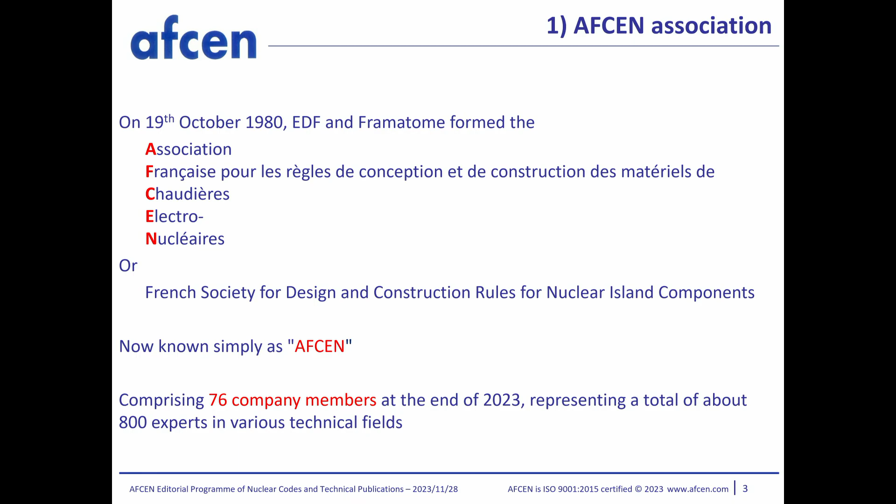It's an association, a society, an institute if you will, whose purpose is to set out rules for design and construction of nuclear island structures, systems, and components, as we will see later. This association brings together about 76 company members, with experts delegated by these 76 company members as we speak today. Globally, we are talking several hundreds of experts working part-time, most of the time, for AFCEN, in the various committees that we'll shortly describe.

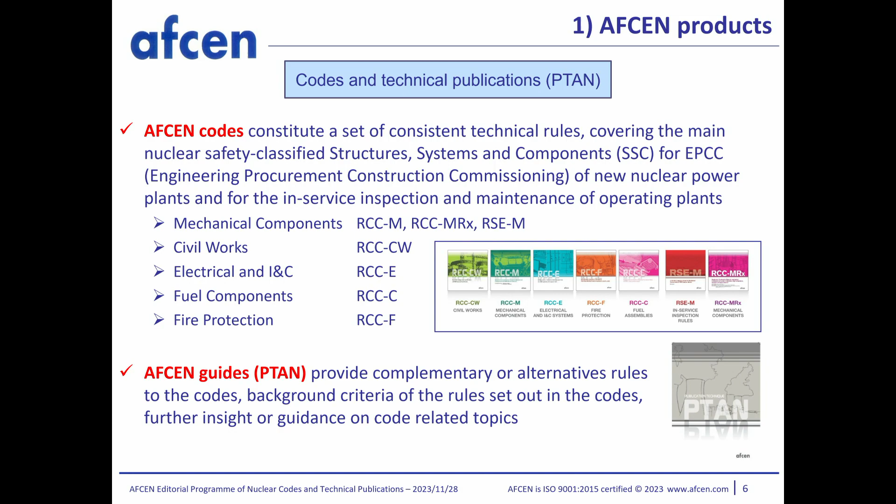So a few figures, and then we come to our products. Very basically, our products, first is the AFCEN codes, and we will detail the scope of AFCEN codes and their program of work a little bit later. This comprises 7 codes covering the main structures, systems, and components of nuclear power plants, but having a nuclear safety function - that's important. So mechanical components, civil structures, electrical and I&C components, fuel components as well, and fire protection. Most of them for pressurized water reactors, but one of them, the RCC-MRx, is for mechanical components for advanced reactors, high temperatures, fast breeders, experimental or even fusion reactors.

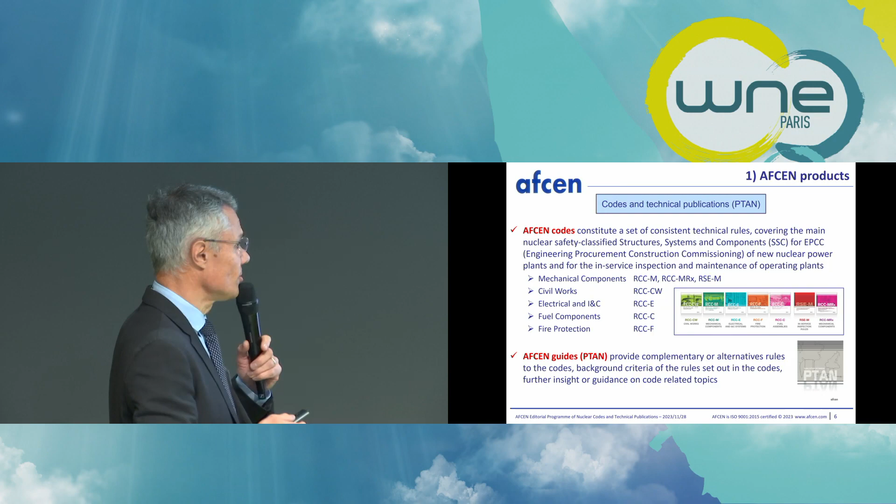And these codes are complemented by a set of guides, which we call PTAN. You have to get used and familiar with this name, PTAN. These guides provide complementary or alternative rules to the codes, and we'll see later a couple of examples.

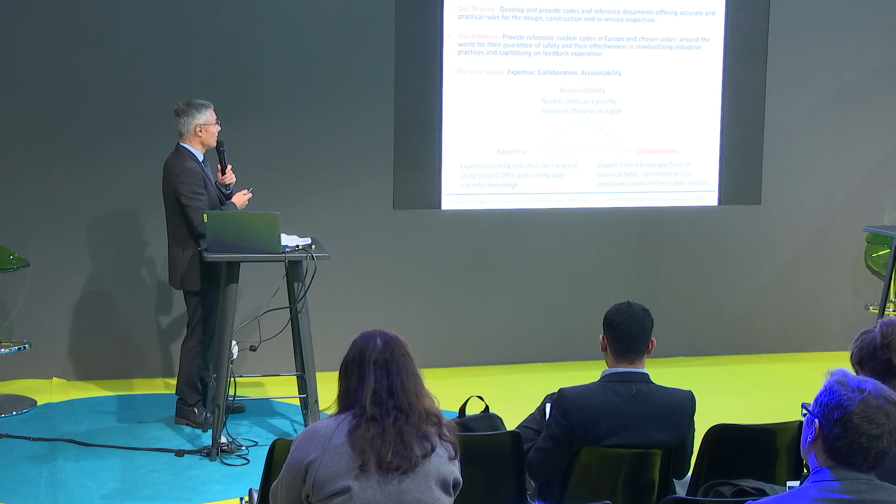Our field is really very centered on Europe, because we reference European standards a lot, and we have several examples of project development, first and foremost in France, but also in Europe. So really our ambition is focused towards Europe.

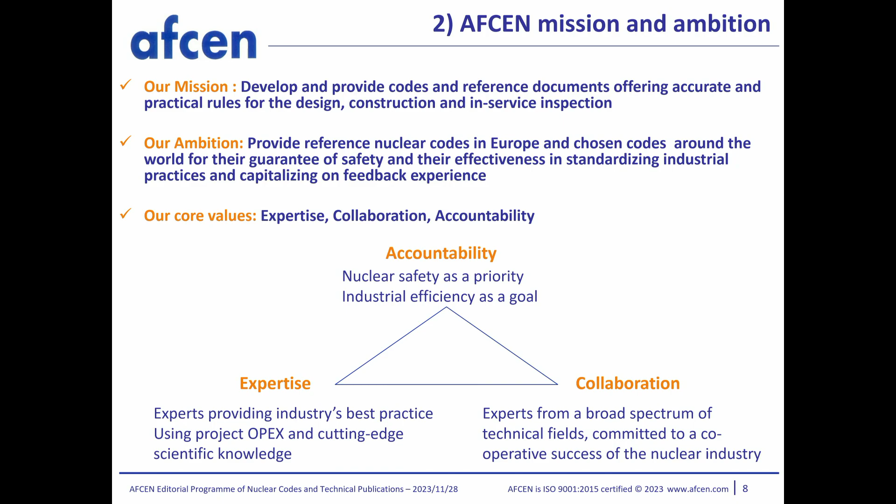Our values: expertise comes first, because we are an institute with experts sharing their knowledge and understanding, discussing and coming to a consensus about the rules to be used in the industry. Nuclear safety is the main driver and a priority, but we also need to consider efficiency of the industry. This is a balance to be discussed and agreed to come up with requirements and rules, and all these experts come to AFCEN to collaborate together.

There are three main challenges in our strategic plan. The first is about the editorial policy for codes, which I'll develop further. The second challenge is about interacting with our stakeholders; we need to be even more recognized and known by prospects, regulators or suppliers, and again our main target is the European landscape.

The third challenge is about knowledge in our codes and the ability to use them properly. That's very much in relation with the training that we, or partners of AFCEN, are providing.

But all these challenges cannot be overcome without as many resources as possible, expertise from all the industry. So this is a call to all of you at the WNE exhibition to join AFCEN. The more, the better for our rules, to have efficient, practicable, and safe rules for our power plants.

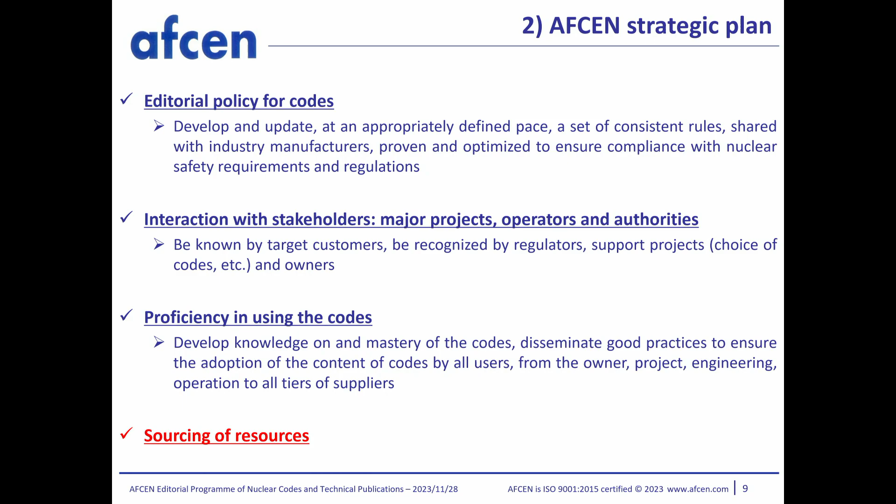Regarding the editorial policy, the challenge is really about clarifying the content, the intent, and the deadlines to further develop our codes and technical publications. To do so we need to consider a number of things, but most important is the experience feedback loop, and again this cannot be done without the support from everyone in the industry.

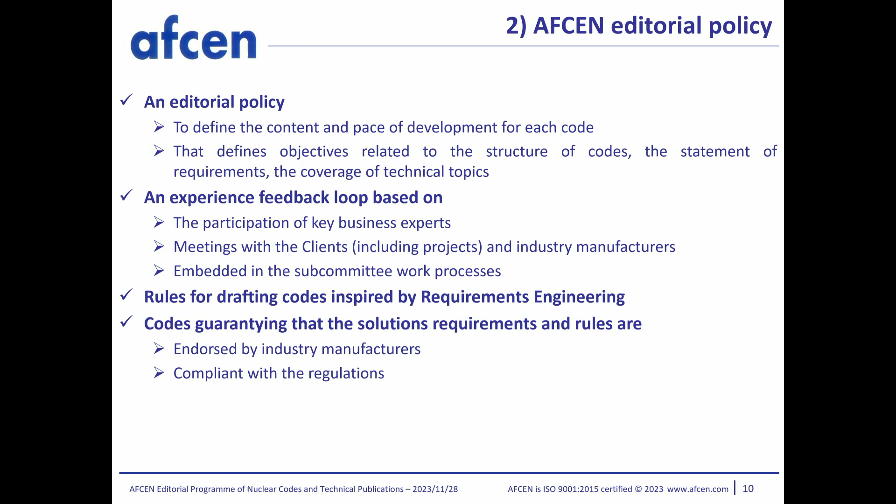We need the participation of key business experts, and we need to be proactive and go to our main clients, the projects or the main users, the suppliers and the manufacturers, to ask about their need and their experience. That's the whole idea, and all our committees work with that objective in mind.

So let's go now a little bit more in detail into the codes. We'll detail the scope of each code, what kind of structures or components they cover, what kind of activities they cover. But you'll find out they constitute a consistent set of technical rules from design to construction and in-service for these SSCs.

Let's start with the RCC-CW code, whose scope of application is really for civil structures that have a nuclear safety function.

The code covers all parts of the civil structures, from the geotechnical works to the buildings, concrete, reinforced concrete, or pre-stressed concrete for the containment building, the metallic liner for tightness of the containment building or fuel pools, all types of structural steel work, nuclear safety classified steel work, and the components in the civil works, such as anchors, joints, coatings, and paints.

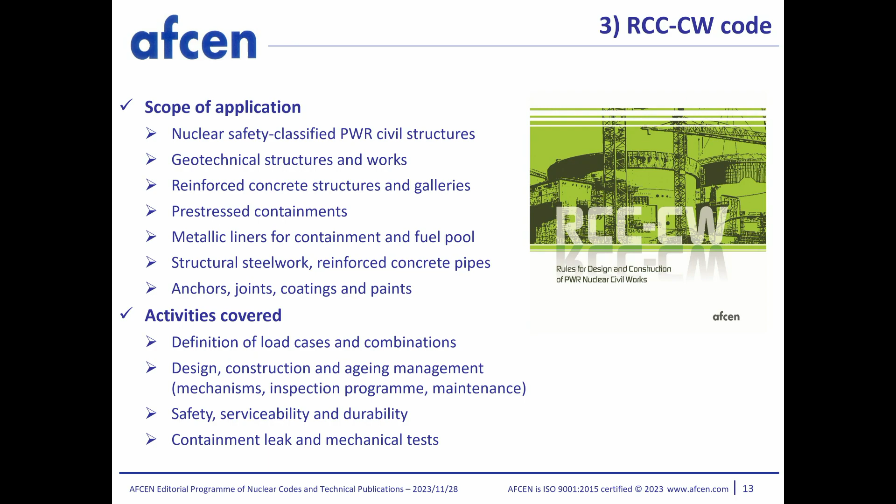Activities covered go from design up to construction, and now our codes also include chapters dedicated to aging management of the civil structures, all to serve safety, serviceability, and durability of these components.

Okay, the RCC-M code, maybe one of the most famous codes in our suite.

RCC-M code covers mechanical components of pressurized water reactors' nuclear island. Mechanical components mainly means pressure equipment or parts attached or included in this pressure equipment, with 3 levels of quality as usual. Parts attached or inside this equipment include vessel internals, supports, also other equipment like storage tanks, piping, vessels, heat exchangers, pumps, and containment penetrations.

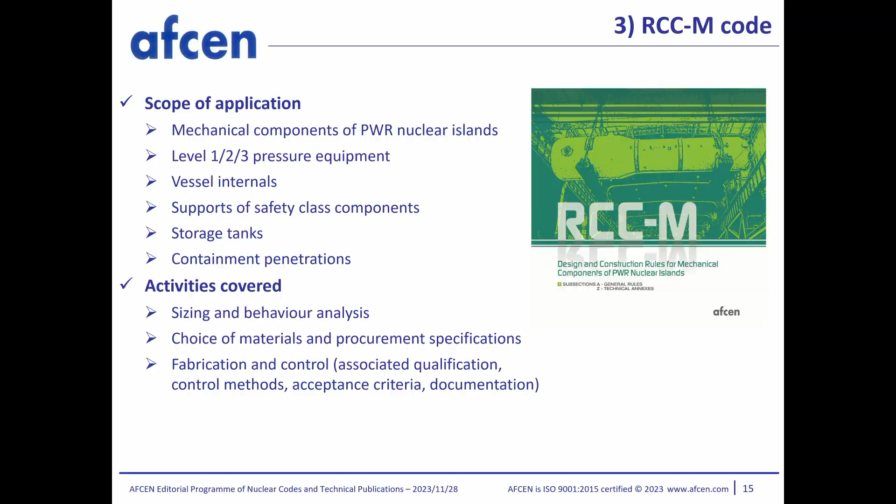Activities covered go from the design, its sizing and stress reports, the materials, how you choose the materials, the specifications to procure parts and products, fabrication and control processes and methods, all the rules to qualify these processes and methods, and all the documentation parts. So it's really a comprehensive guide to construct, that is design and build, such pressure equipment.

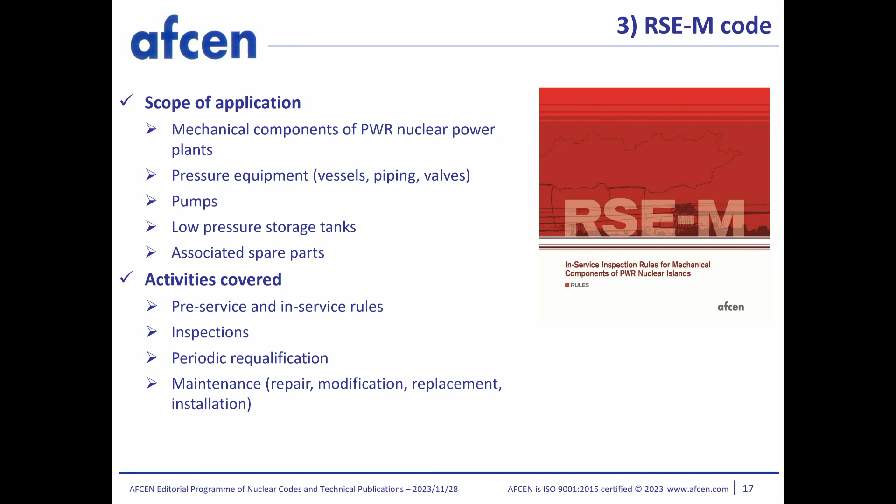RSE-M code is the companion code, if you will, to the RCCM, because it deals with in-service inspection of roughly the same scope of mechanical equipment as the RCCM. So again, vessels, piping, valves, pumps, storage tanks, and all associated spare parts. During in-service, it starts with the pre-service inspections and covers up to maintenance, that is repair, modifications, replacement, and how to install them on an existing plant.

So the last one is another mechanical code, if you will, but it deals very specifically with the nuclear fuel components. So the fuel assemblies with its fuel rods and fuel pellets inside, but also the control cluster assemblies, rod cluster control assemblies.

And similarly as for the other mechanical equipment, it covers design up to manufacturing and inspection of these components. But also interesting to mention, it also deals with the requirements for handling the fuel and transporting and storing them.

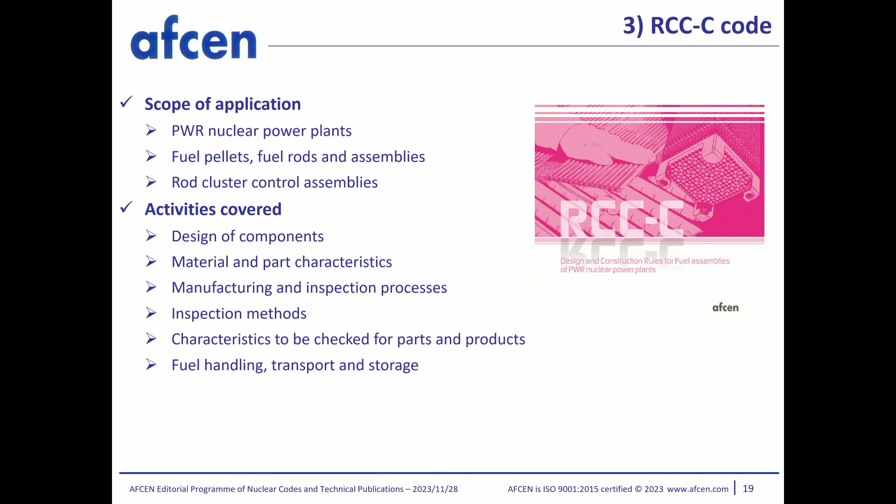Okay, let's change now a little bit of discipline. This is electrical and automation, instrumentation and control, again for safety classified systems or systems that could have an impact on safety classified systems. So you have parts in the code dealing with how to design the architecture of electrical systems, or the architecture of I&C systems, and other parts dedicated to how to procure, build, and qualify electrical or I&C equipment.

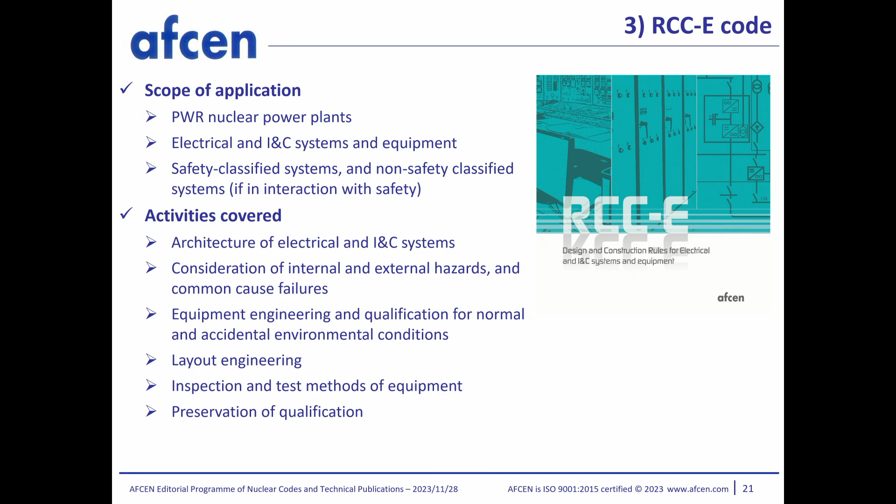Qualification means rules to demonstrate that your equipment will fulfill its functions even during accidental conditions. There's a dedicated volume on how to lay out these systems and equipment, considering all kinds of hazards, internal, external hazards, or common cause failures, and also a part dedicated to inspection and test methods for this equipment. Also important to mention, the RCC-E manages the preservation of qualification for this equipment during the lifetime of the plant.

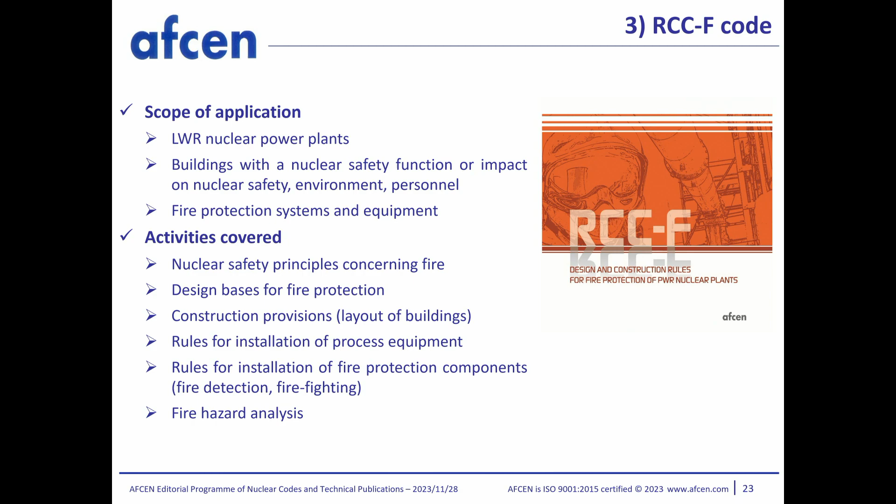The next one is the code on fire protection, applying to buildings with a nuclear safety function or hosting nuclear safety classified equipment. So the code will give you principles for nuclear safety regarding the fire hazard, a basis to design the fire protection systems in your building, and also provisions to lay out the buildings. Most important, it's really a guide to take you through the assessment of the fire hazard.

RCC-MRx is a very special code for mechanical components of advanced reactors, so far used for fast breeders, sodium-cooled fast reactors, research reactors like Jules Horowitz reactor, and fusion reactors. Parts of ITER are using the RCC-MRx. Again, in the same way as the RCCM, it covers from design to fabrication, including welding, of course.

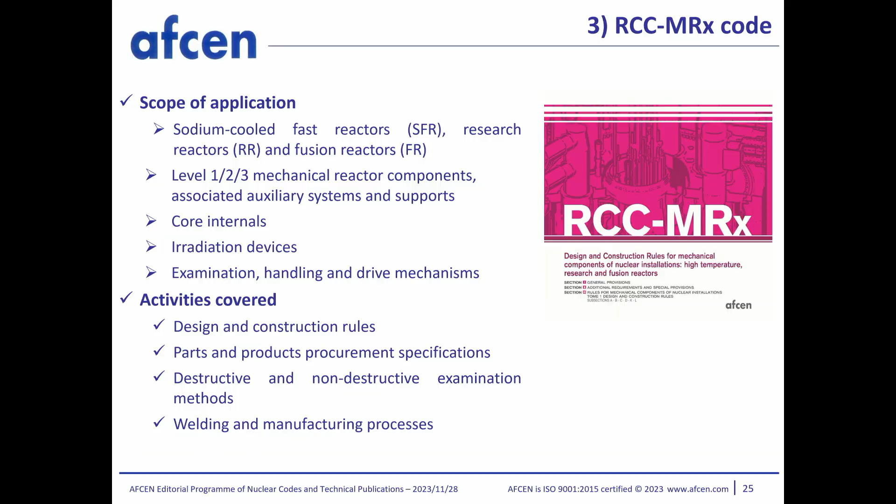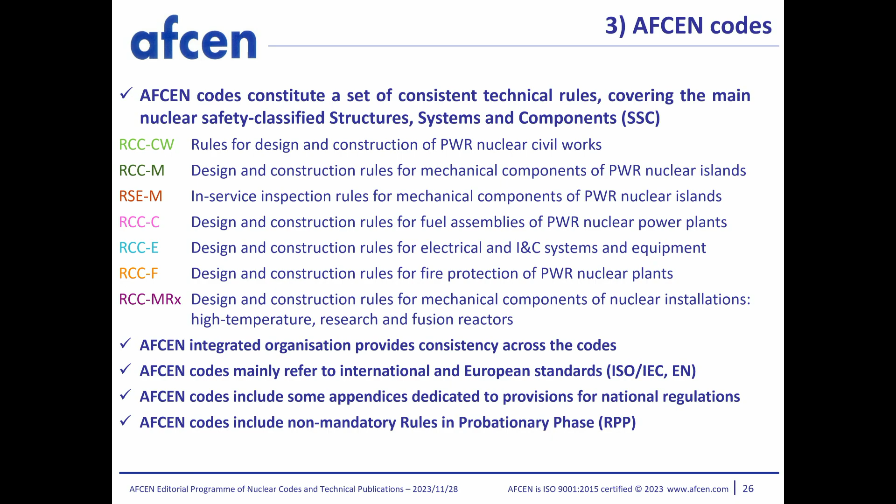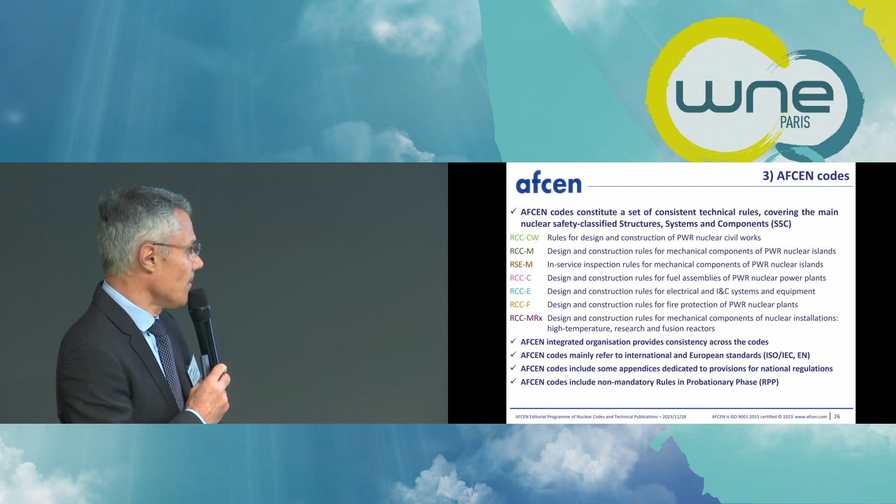So that's a brief description of the scope for these AFCEN 7 codes, just to show that the benefit of having them managed inside one association is that it will provide consistency across the code and better manage the technical interfaces. And that's all, I need to move on.

A couple of examples of AFCEN technical guides that are complementary to the code. Some guides will give you more in-depth understanding of the background of the code or of their evolutions over time, because we are publishing revisions of the code every 2 or 3 years basically, so it's important that we explain the modifications, the changes introduced. Other guides give you requirements, typically a very recent guide published last year, or early this year, on cybersecurity for electrical and I&C systems.

There are quite a number of guides regarding the application of the infamous nuclear pressure equipment regulation in France, ESPN. And other guides to help you introduce a new material or help you define the right seismic isolation approach for your nuclear facilities, for example.

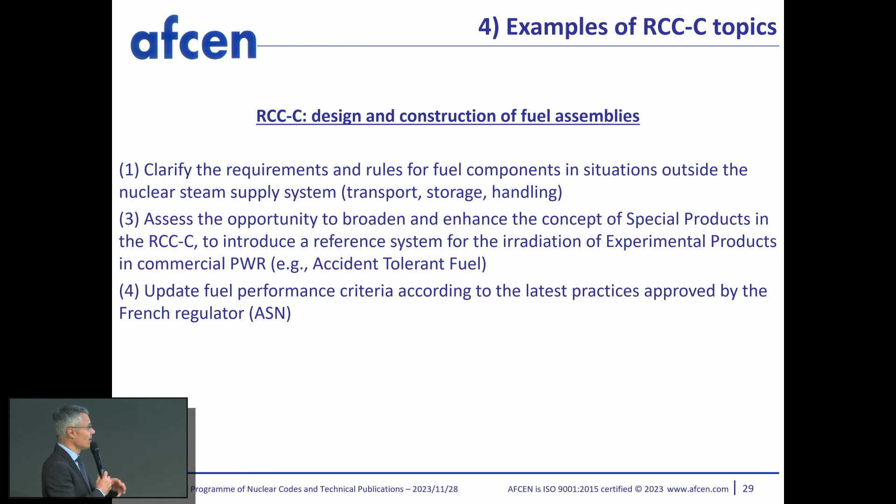A few examples on the fuel, the RCCC code for fuel assemblies. For instance, our users still need better clarification regarding requirements and rules for the fuel components when outside of the nuclear steam supply system, when they are being transported or stored. We also aim at introducing a reference system to allow for the introduction of special, innovative products inside a commercial PWR, just to support this testing.

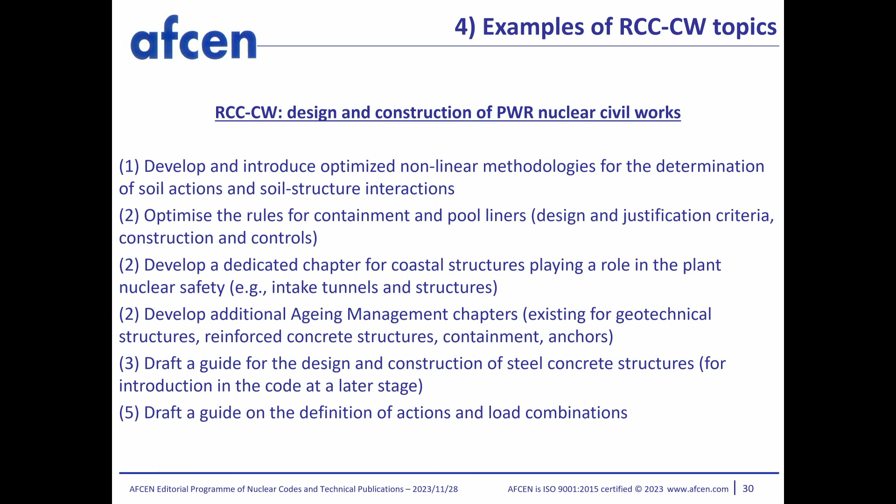Regarding the civil work, what I could highlight is our users express the need to have further optimized nonlinear methodologies for geotechnics, the determination of actions from the soil and the soil-structure interactions. But we also recognize that we still have progress to make regarding the rules for the liners, and that's based on the operational experience from our various projects.

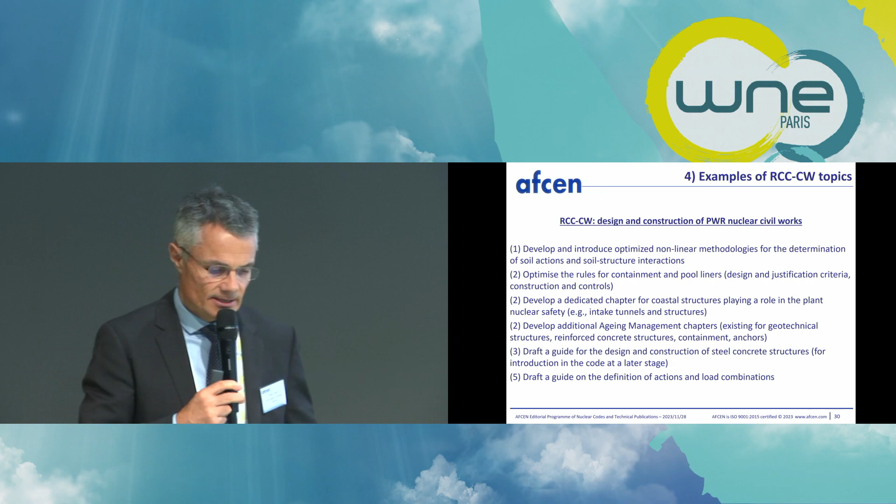We also aim at developing a dedicated chapter for coastal structures, based on the experience feedback from the Hinkley Point project in the UK. We are still further developing our aging management chapters, and most important in terms of innovations, we will soon be drafting a guide for steel-concrete structures. That's really a key challenge, in particular for SMRs.

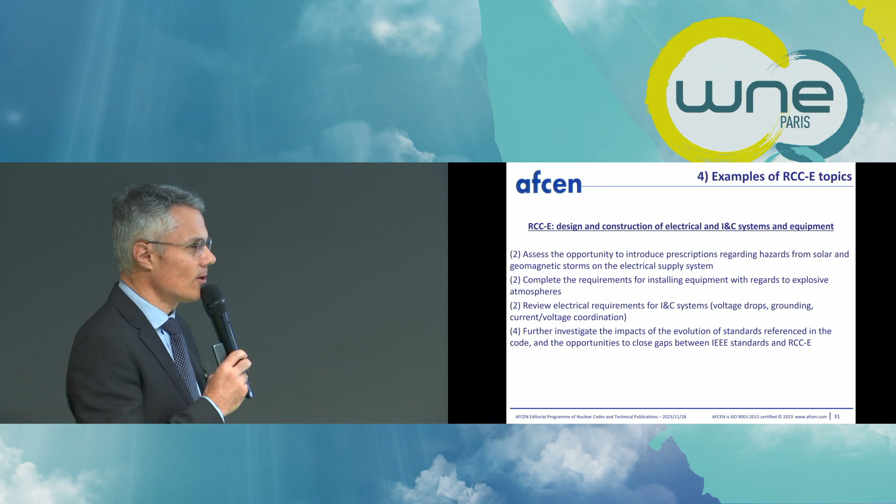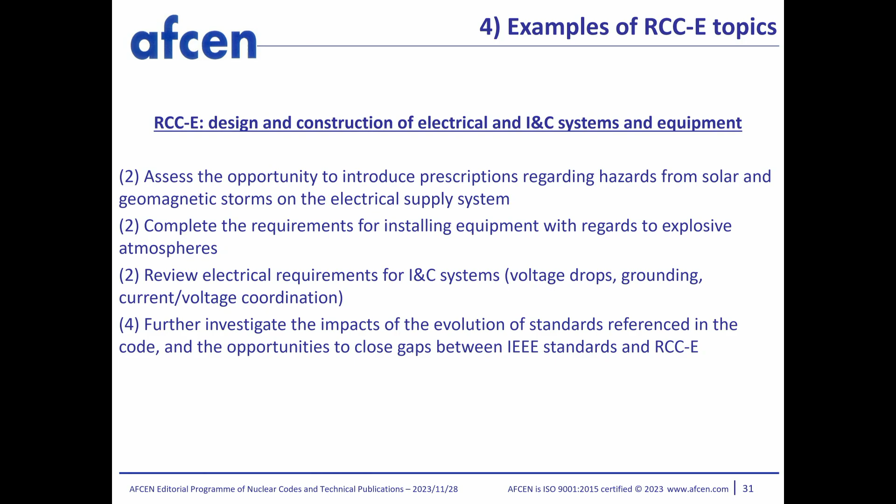Regarding RCC-E topics, there are still discussions to further develop the list of hazards to be taken into account when designing and qualifying electrical and I&C systems and equipment. We've also recently performed a comparison study between RCC-E and the IEEE standards, and as we speak, we're still thinking about what could be introduced or changed in the code to, as much as possible, bridge the gap with these standards, or just recognize that there is a difference and we are comfortable with these differences.

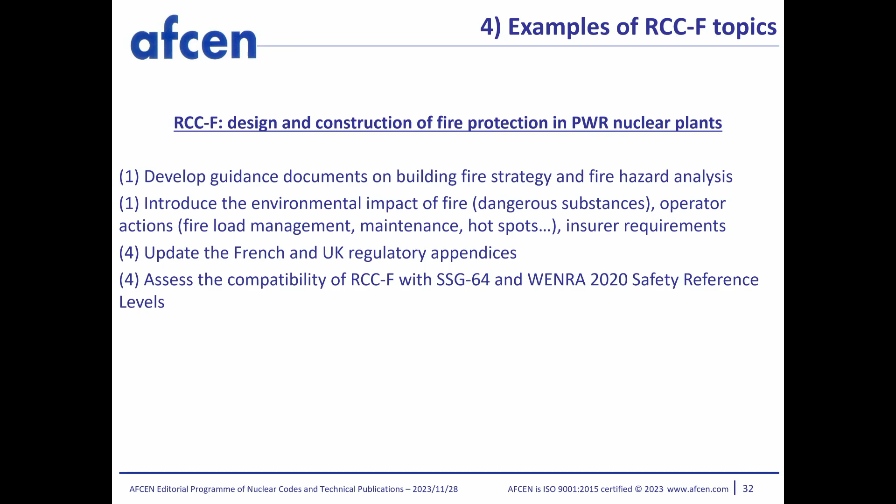In terms of fire, in the next edition we mean to introduce other types of impacts of fire, typically regarding the environment, or other types of actions related to the risk of fire. Important to mention that in the RCCF there are appendices to manage fire regulations in France and in the UK. You all know these fire regulations are very specific from one country to another, and it's important that we take this into account and combine them with the requirements for nuclear safety.

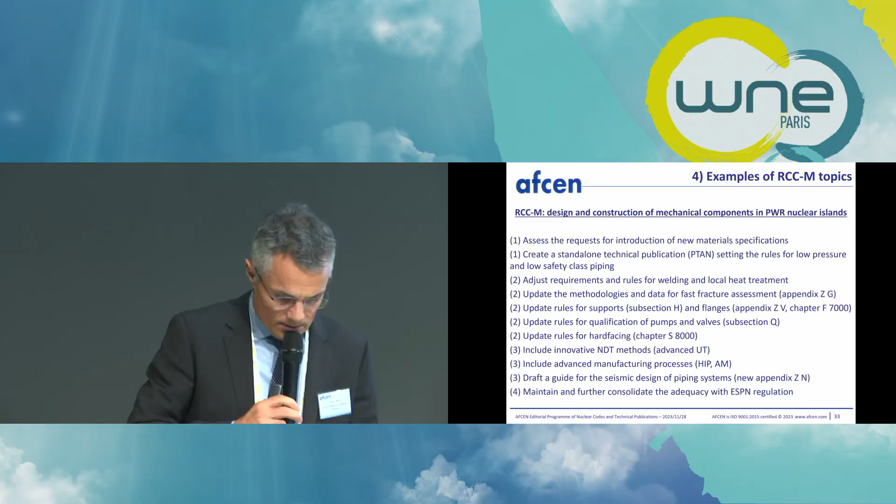RCCM has quite a long list of topics because it's a huge code. We're undergoing many developments. I could briefly mention: we are just about to issue a technical publication for the rules for low pressure and low safety class piping. We have a lot of operational experience to take into account regarding welding and local heat treatment, and important to mention also qualification of active mechanical components, pumps, valves. There's a dedicated section in the code for qualification of equipment.

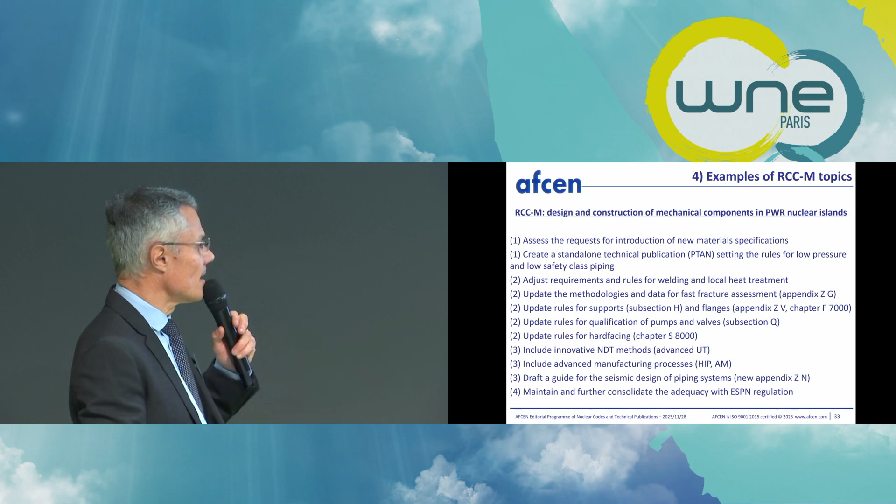In terms of innovative topics, there are quite a few regarding non-destructive testing methods, or advanced manufacturing processes, additive manufacturing, or hot isostatic pressing. Again, we still have a line of work regarding the ESPN regulations. Same goes actually for the RSEM, a lot to do with the ESPN regulation. But for ESPN, we are also trying to have it adopted and adapted to the UK for the operation of the EPR reactors.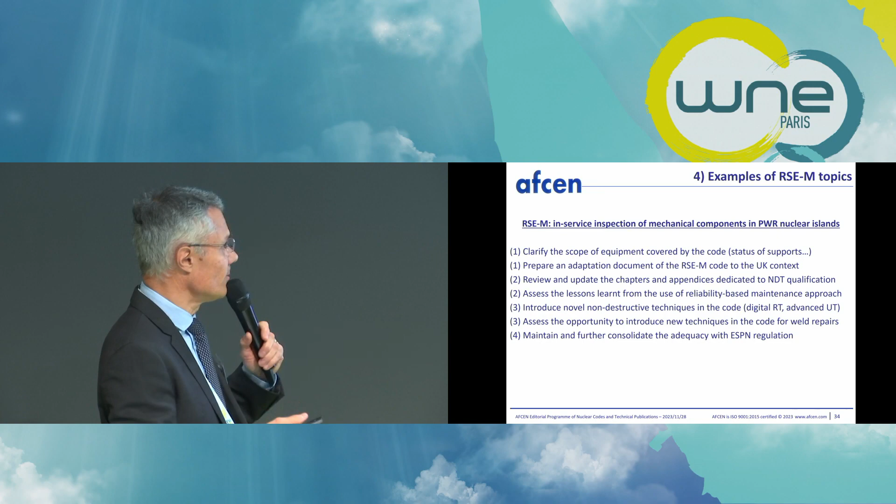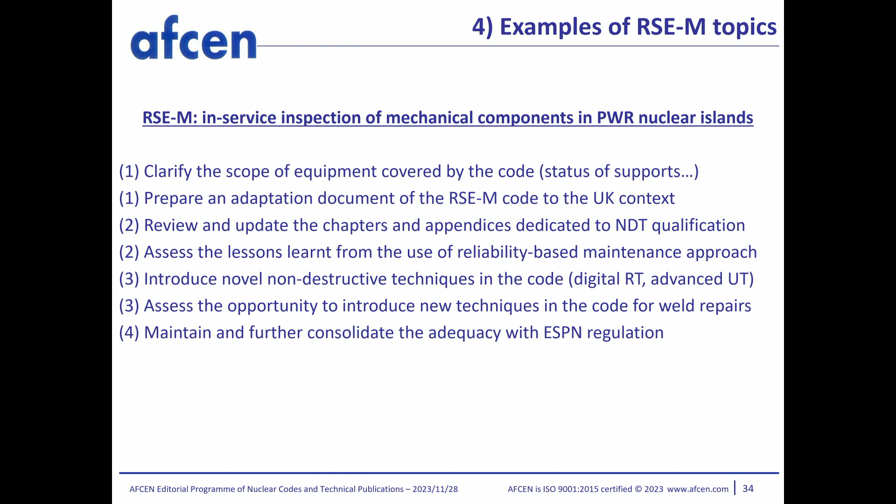In the UK, similarly as for the RCC-M, some challenges regarding the introduction of novel non-destructive techniques, also techniques for repairing welds during operation. The RCC-MRx has a lot to learn from application in the ITER, Jules Horowitz, or MYRRHA projects, still ongoing. Important to mention also that the RCC-MRx has issued a guide for how to introduce a new material into the code, and that will be further updated.

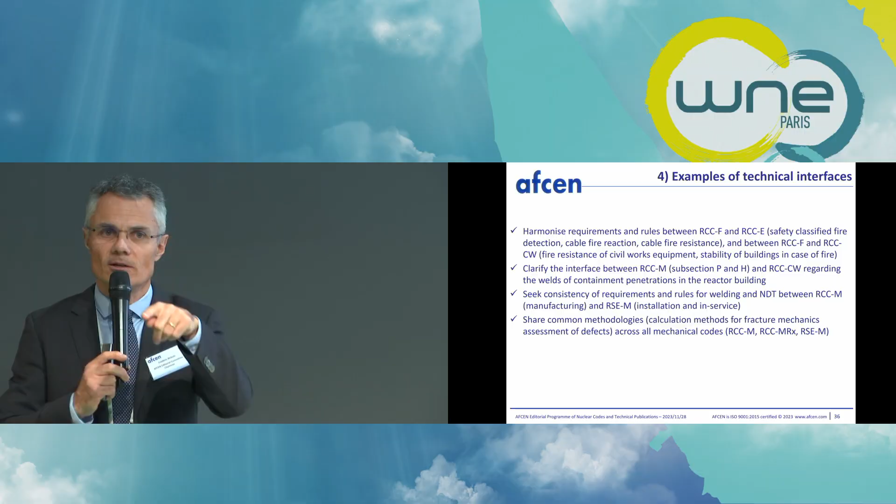Okay, so I understand we will meet in the room just next to the workshop. We're happy to discuss, and in particular my last two slides were about technical interfaces between codes, so that we can discuss. Also transverse objectives that all of our codes are doing their best to achieve. Thank you very much.